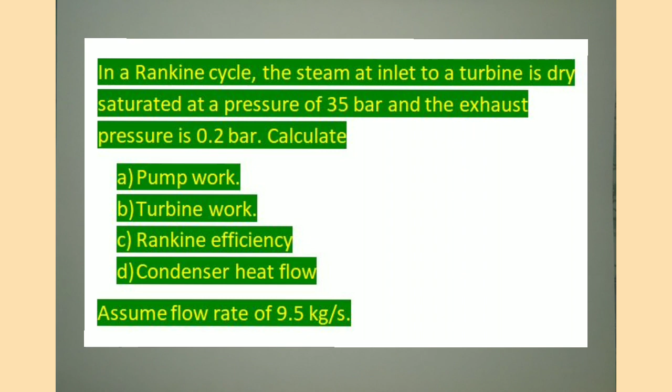In the question, it is given that the condition of steam at the turbine inlet, that is state 1, is dry saturated steam. Therefore, we can draw the ideal Rankine cycle, that is TS diagram and HS diagram of ideal Rankine cycle.

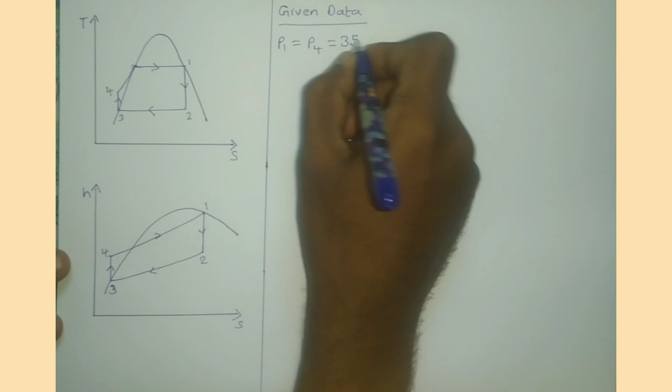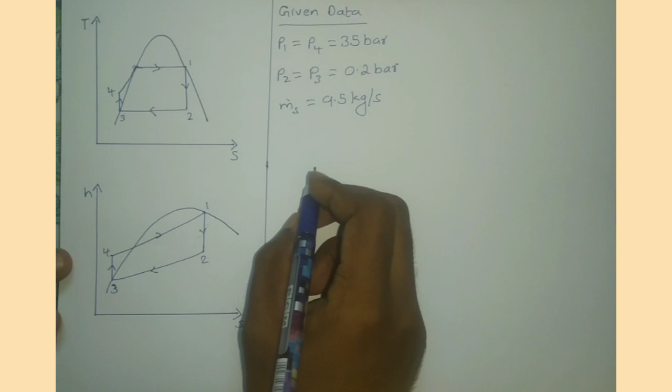Okay, now we can write the given data. In the question, the pressure of steam at the turbine inlet, that is boiler pressure, is given. It is P1 equals P4 equals 35 bar. Also the exhaust pressure, that is condenser pressure, is given. It is P2 equals P3 equal to 0.2 bar. Mass flow rate of steam is given. It is 9.5 kg per second.

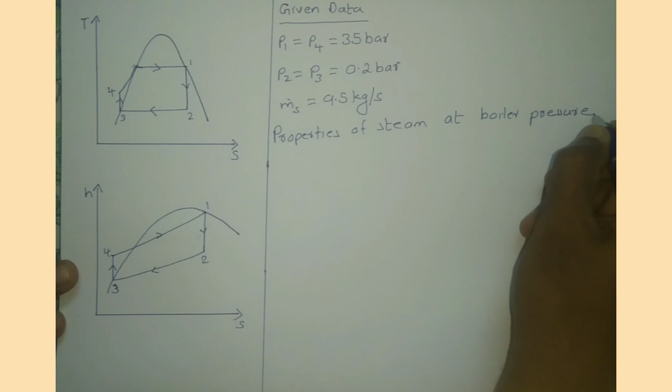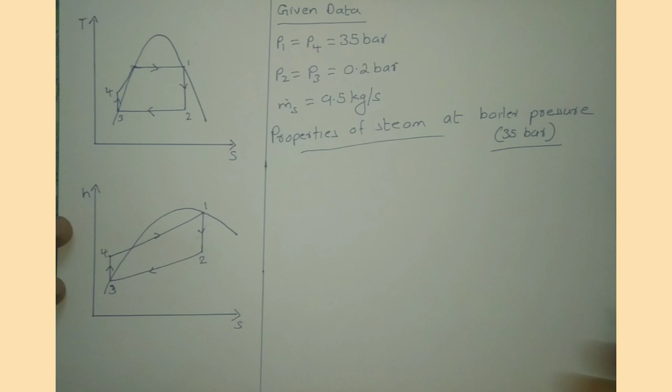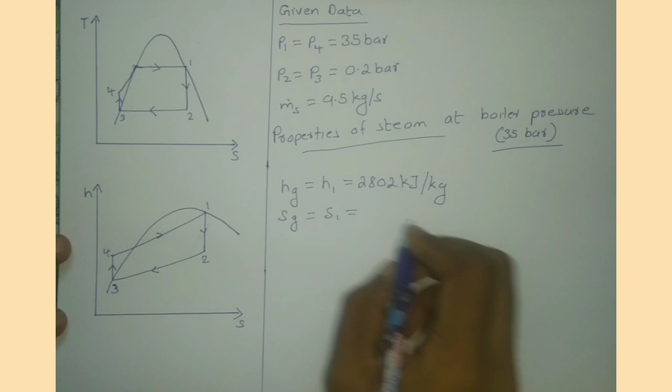Now we can find the properties of steam at boiler pressure, that is 35 bar. I am using steam table by R.S. Khurmi, and from saturated pressure tables I found 35 bar, and now I can write the properties. The condition of steam at state 1 is dry saturated, that is Hg equals H1 equals 2802 kJ per kilogram. Also Sg equals S1 equals 6.123 kJ per kilogram Kelvin.

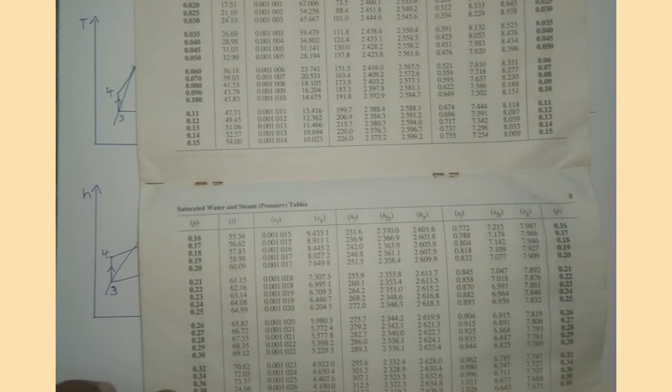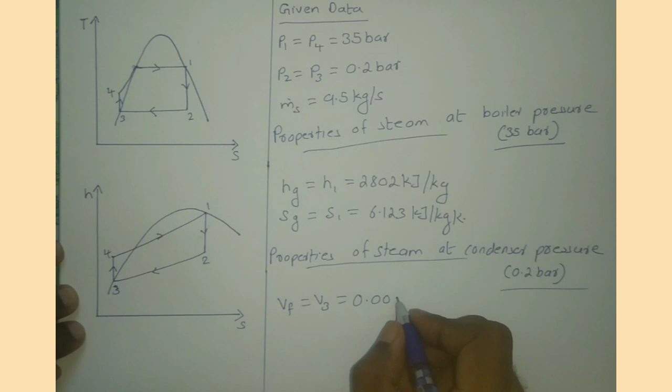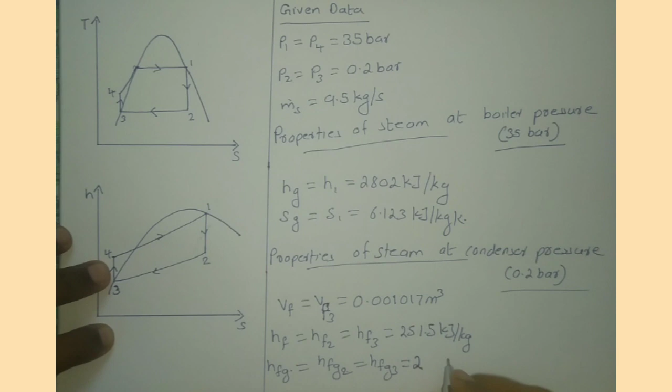Now we can find properties of steam at condenser pressure, that is 0.2 bar. From saturated pressure tables I found 0.2 bar, and now we can write the properties. State 2 and 3 are at same pressure, therefore properties from steam table at state 2 and 3 are same. Vf equals Vf3 equals 0.001017 meter cube. Also Hf equals Hf2 equals Hf3 equals 251.5 kJ per kilogram. Similarly, Hfg equals Hfg2 equals Hfg3 equals 2358.4 kJ per kilogram.

Similarly, Sf equals Sf2 equals Sf3 equals 0.832 kJ per kilogram Kelvin. Sfg equals Sfg2 equals Sfg3, it is 7.077 kJ per kilogram Kelvin.

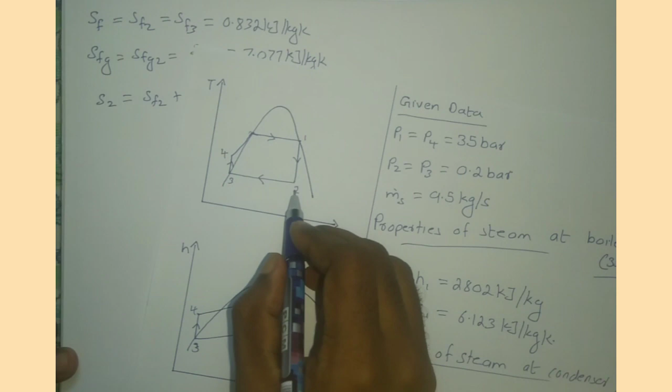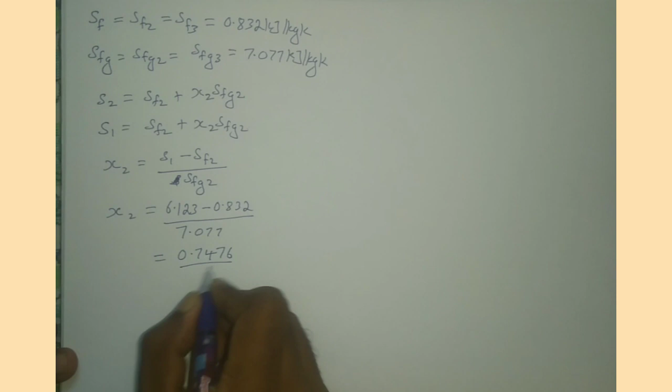Okay, we can write S2 equals Sf2 plus x2 into Sfg2. But S2 is same as S1. Therefore, we can write S1 equals Sf2 plus x2 into Sfg2. That is x2 equals S1 minus Sf2 by Sfg2. After substituting values, we will get x2 as 0.7476. And now we can find H2.

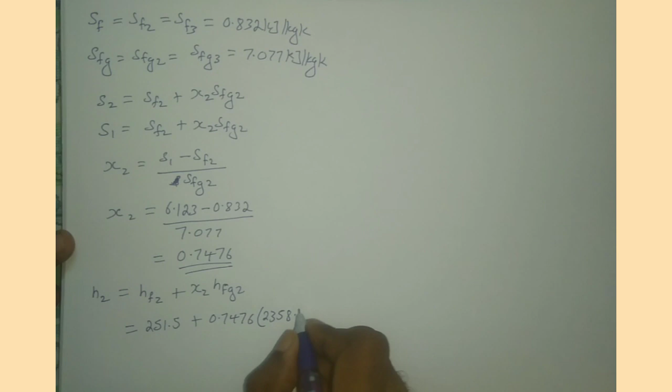H2 equals Hf2 plus x2 into Hfg2. And we can substitute the values. We know x2. Therefore, H2 equals 2014.63 kilojoule per kilogram.

Okay, we know the value of Hf3. It is same as H3 because state 3 is saturated liquid. Therefore, H3 equals 251.5 kilojoule per kilogram.

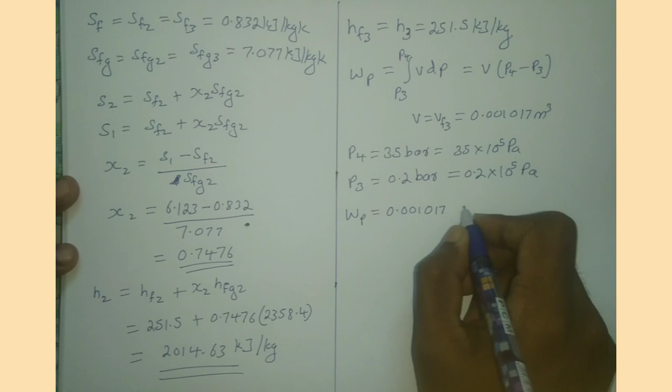We know the formula for pump work. It is integral P3 to P4 VdP, that is V into P4 minus P3. V is the specific volume at state 3, that is 0.001017 meter cube. And pressure P4 is 35 into 10 raised to 5 Pascal and P3 is 0.2 into 10 raised to 5 Pascal. And now we can find the pump work. It is 3.539 kilojoule per kilogram. There is another formula for pump work.

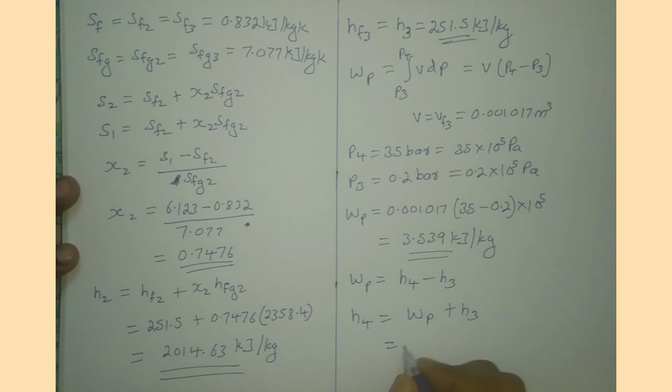It is H4 minus H3. Therefore, we can find H4 equals Wp plus H3. That is H4 equals 255 kilojoule per kilogram.

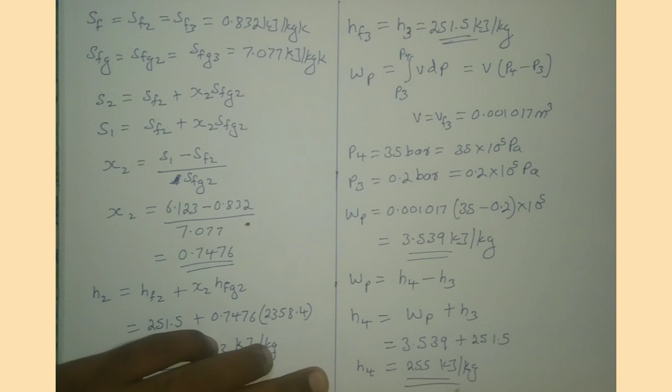Okay, the first question is pump work. Since mass flow rate is given, Wp equals m dot s into small letter Wp. After substituting values, we will get pump work as 33.62 kilowatt. Next is turbine work.

That is process 1 to 2. It is Wt equals m dot s into H1 minus H2. After substituting values, we will get turbine work as 7480 kilowatt. Now we can find heat input.

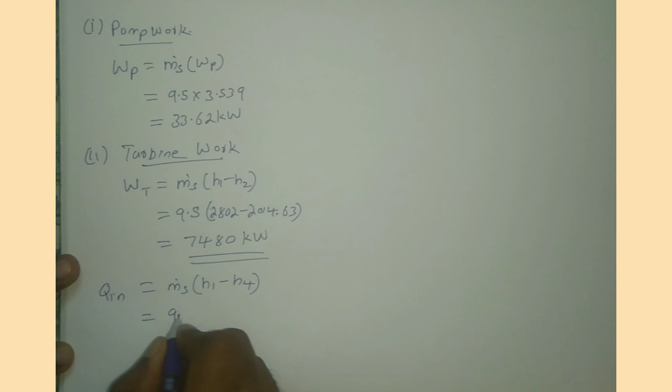It is process 4 to 1, that is m dot s into H1 minus H4. After substituting values, we will get heat input as 24,196.5 kilowatt.

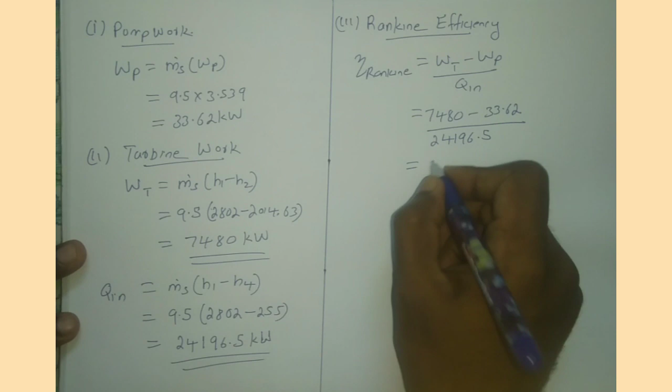Next question is Rankine efficiency. That is efficiency Rankine equals Wt minus Wp by Qin. Okay, we know the values and we can substitute and we will get Rankine efficiency as 0.307, that is 30.7%. The last question is condenser heat flow.

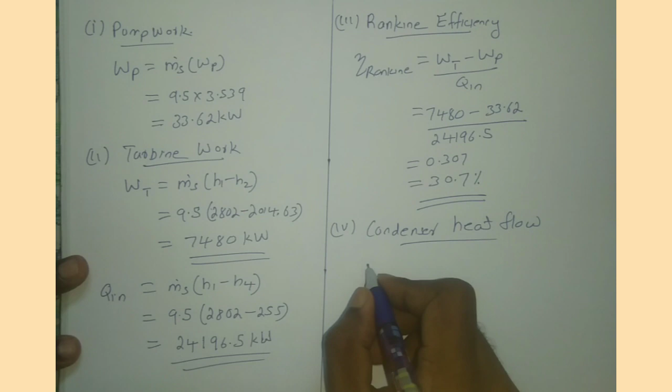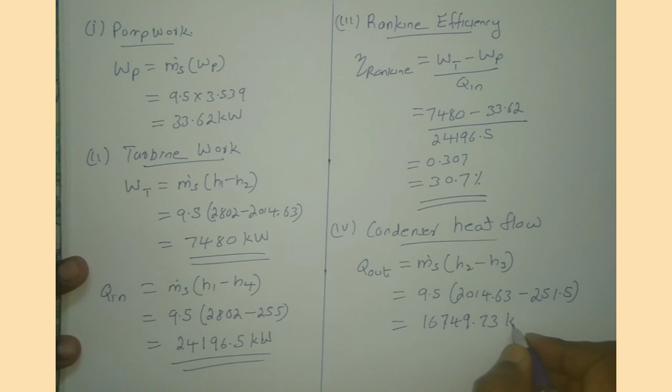That is Q out. It is process 2 to 3, that is m dot s into H2 minus H3. After substituting values, we will get condenser heat flow as 16,749.73 kilowatt. Okay, I hope you understood the problem.